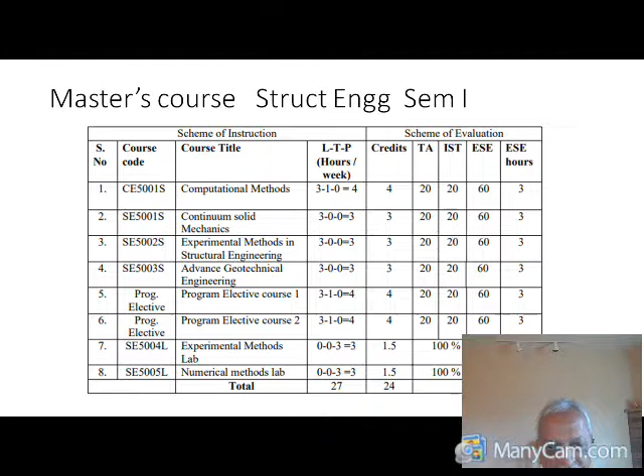So if you want to refine your understanding and narrow the gap between the predicted behavior and the observed behavior, then we have to go on reducing the number of assumptions, go for a realistic structure, its idealization, a refined idealization, and then predict the behavior, which brings you closer to reality.

If you see the primary objective of structural engineering, as a structural engineer, when you want to master it, you must realize that as a structural system, when your objective is understood properly—consider the primary objective of structural engineering—you will see that in structural engineering we first of all have a structural system, a structure for that matter. Secondly, it has to carry some loads, and thirdly, the structure must be so designed, so analyzed, so planned, so constructed that it carries the load applied on it safely and efficiently.

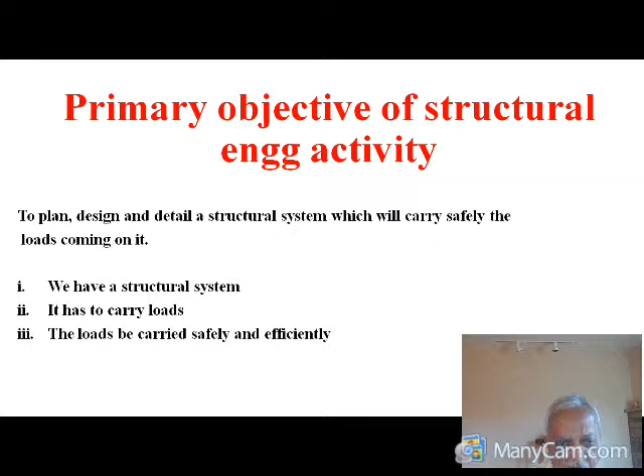So first of all, we have a structural system. Now what is a structural system? If you ask a common man what a structure is, he has got some vague idea. He will say there might be buildings, bridges, or fluid containing tanks like water tanks, oil tanks, and so on. Or there are retaining walls in hilly areas where you retain earth which is otherwise going to slip. Then you have dams where water is retained on one side, or the aircraft structure which floats in air, carries the weight from one place to another.

Then you have the ship which floats on water, again carries weight from one place to other place. Then you have automobiles which move on the road surface, but again carry loads. Then you have tunnels for passage of roads, railways, or pipelines. Then you have jetties for berthing of ships on the port and harbor. Then you have cranes for lifting material. These days at many construction sites you will see tower cranes erected for transport of material from ground to the required level. Then you have balloons, which many times were used, even for entertainment purpose, for taking objects up the sky, transporting them from one place to another.

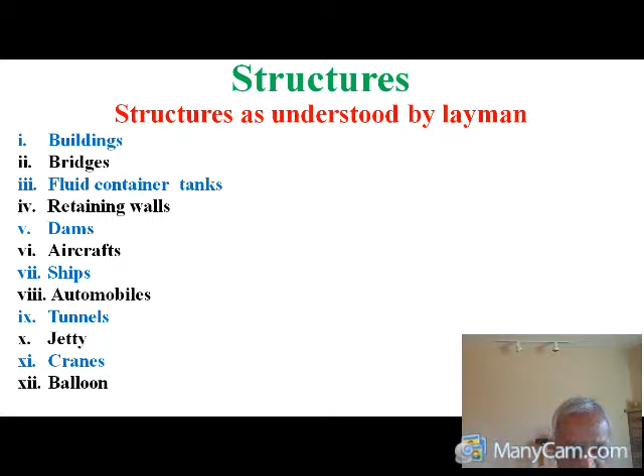While in floor grid you have beams and slab construction, the slab is a two-dimensional medium. Then you have shells, which are three-dimensional structures, many times used for roofs of different types. Then you have folded plates, many times used as roof. Then you have 3D solids, used in foundation blocks. Then you have the plane stress problem, which we will study in detail, the plane strain problem, and so on. So the understanding of a common man as a functional description for structures, and this proper itemization of different components of structures, is what an engineer tries to understand.

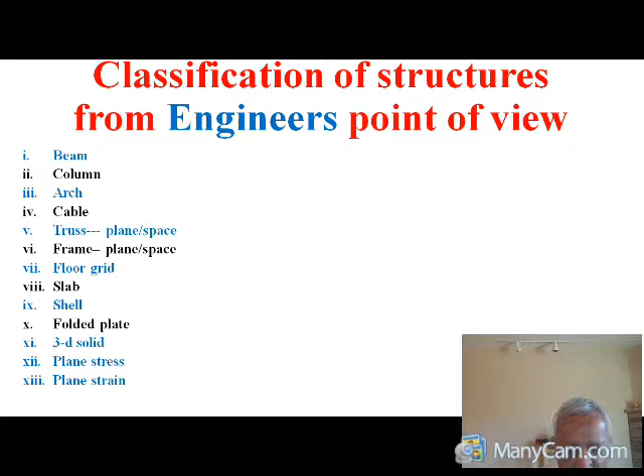In that also, among various types of descriptions an engineer gives to structure, if loads are applied on the structure, we say we have a structure made up of several components. Therefore, if you properly define the structure, we say a structure is an assemblage of members suitably connected to each other and supported, so that it carries the load coming on it safely to the support or foundation. Thus, the basic building block of any structure is a member or element which may be 1, 2 or 3 dimensional. So a structure basically is an assemblage of members.

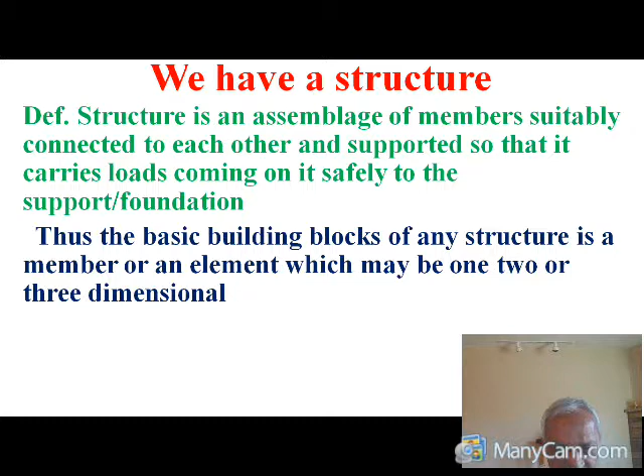So now, what are the basic elements or building blocks of the structure? We have the truss element, the members of the truss, which carry primarily axial force, maybe tension or compression. Then you have the beam element, which carries primarily shear force and bending moment. Then you have the 2 or 3 dimensional frame element, which carries axial force, shear force, bending moment, and so on. Then you have the slab, the 2-dimensional medium, which has bending moment as internal force, the torsional moment, and the shear force.

We have the plane stress element, which we will study in detail in the present coursework, wherein we have the stresses in it, sigma x, sigma y, and tau xy. You have the plane strain element, in plane stresses and out of plane stresses, developing sigma x, sigma y, sigma z, and tau xy. We will see the detailed description of these stresses shortly.

Then we have the membrane element, like a balloon or a shell, where it carries primarily the in-plane stresses sigma x and sigma y. Then we have the shell element, a concrete shell for that matter, which carries membrane forces Nx, Ny, Nxy, the shear and the bending Qx, Qy, Mx, My, and Mxy, the torsional moment.

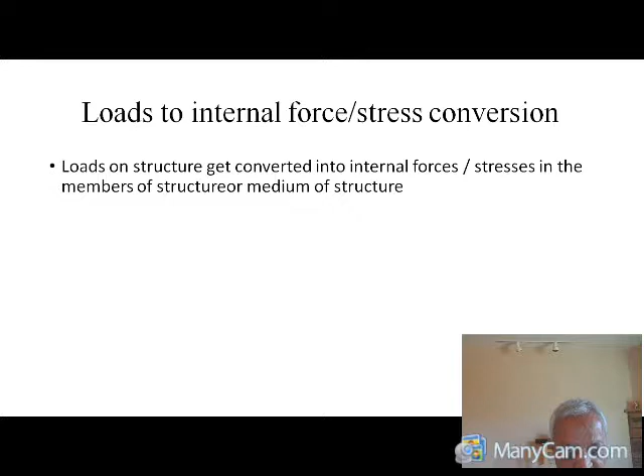So we have the structure and an assemblage of members to carry these loads safely. As far as the loads are concerned, that is many times an external phenomenon, but the structure develops as a resistance internal stresses due to these external loads. So we say that the primary objective of any structure, therefore, is that while resisting the external loads, the structure resists through internal forces.

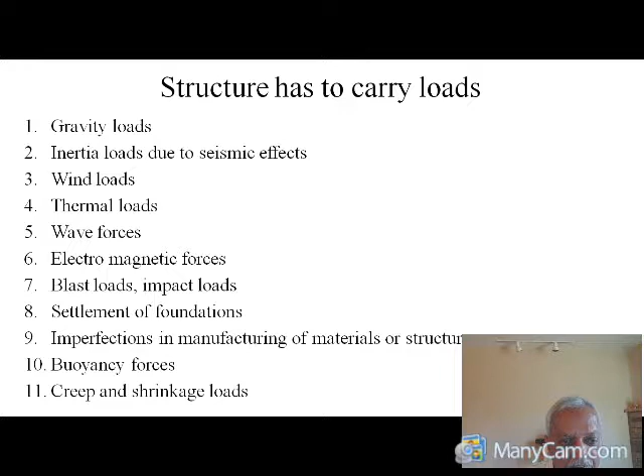Now let us see what internal forces a structure develops. So though there might be various types of loads which we have listed, for any structure, for that matter, when you have got these building blocks - truss, beam, frame and so on and so forth - we see that only 4 types of internal forces are developed in the members.

There might be axial force, which is either tensile or compressive. There might be shear force, there might be bending moment, and there might be torsional moment.

Either one, two, or all of them are developed in the structures. So no matter what structure you are considering, no matter what loads are considered, innumerable structures, innumerable loads, but internal forces are only of 4 types: the axial force, the shear force, the bending moment, and the torsion.

If you go one step forward, what stresses are developed? You must distinguish between a force and a stress. Force is a gross quantity, while stress deals with something on a different level. So you have the member carrying so much force, say kilonewtons, tons, pounds, or kgs, while you have to consider another quantity called stress, which is nothing but force per unit area.

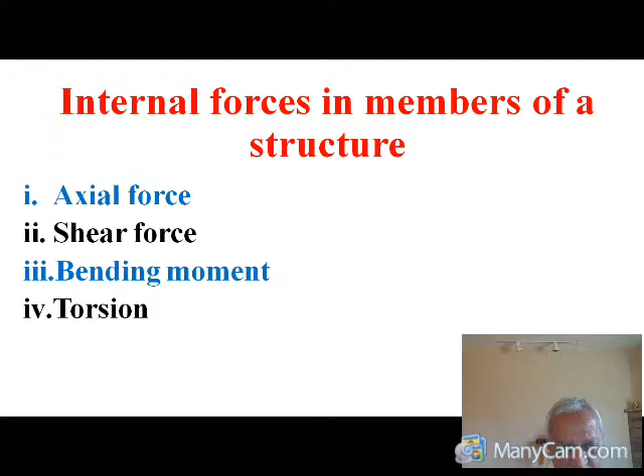So we see that we have started with a structural concept, hundreds of types of structures. Then we have several building blocks of the structures, four types of internal forces developed in the structure, and basically only two types of stresses, but we've further classified that into three because the behavior is sometimes different: normal stress compressive, normal stress tensile, and the shear stress.

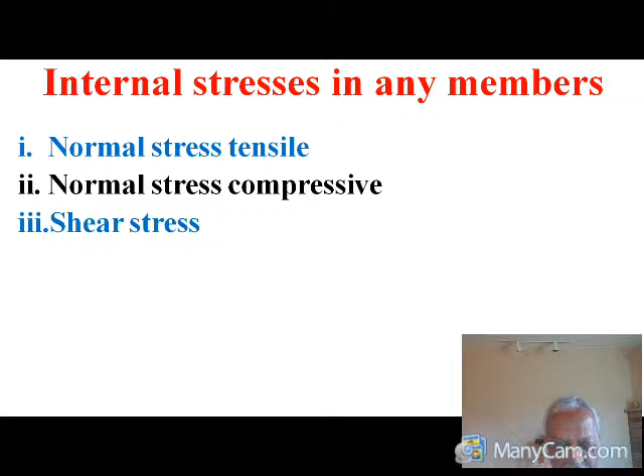Now we say that we have a structure which is to be made out of materials. So various types of materials we deal with. We have different types of materials: the natural materials, the man-made materials, the combination materials, the structural materials, sometimes the aesthetic materials, or the functional materials, and so on. So many different types of materials are being made and used.

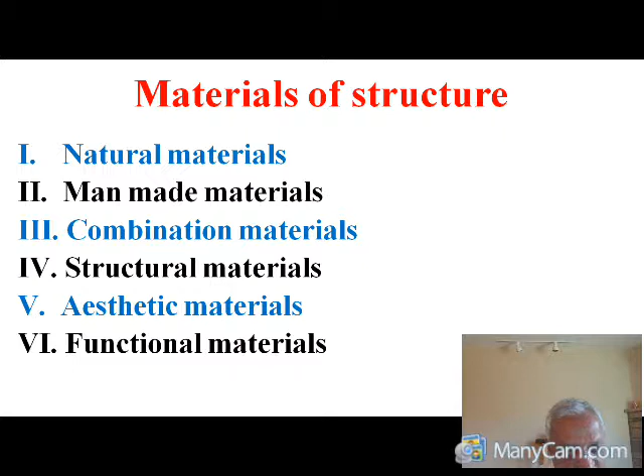As far as natural materials are concerned, we have listed a few, but many more can be added. The soil, the stones, the sand, which can be crushed stone or natural sand, then we have the timber, we have natural fibers which are available in nature, such as jute or bamboo fibers. Then we have the hair, human or animal hair.

We have the skin, the animal skin, which is used in some applications. We have the bone, also used in some applications. Natural material, water or air, and so on.

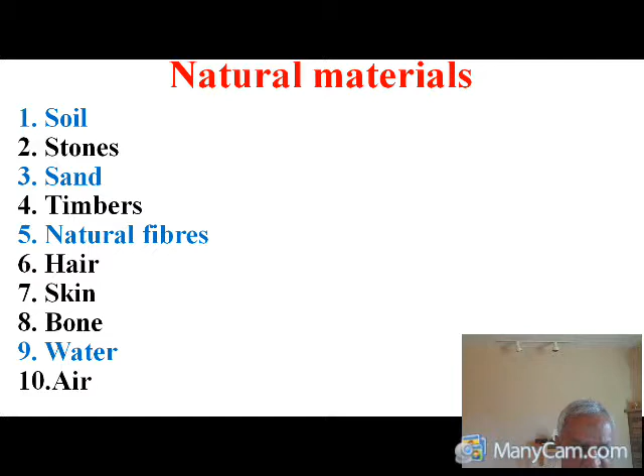So these are all different materials which go into structures in one way or another, and you have to deal with them. As far as man-made materials are concerned, we have bricks, concrete, metals, non-metals, polymers, man-made fibers, and so on. Metals are also available in terms of bulk, rods, or fibers. So there are various types of materials available.

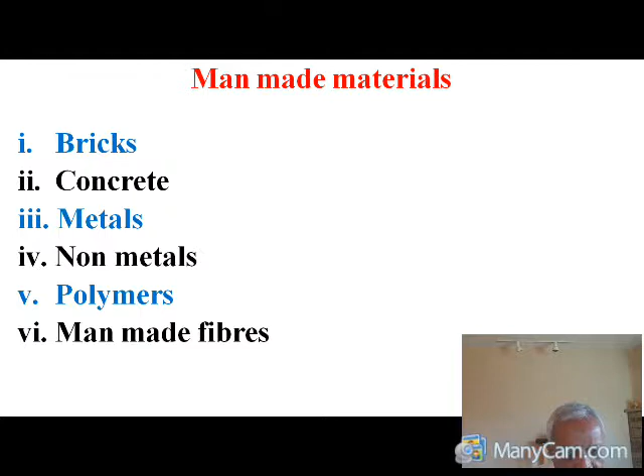Now in olden times, people tried to understand the behavior of simple structures, like the attempt made by Galileo to understand the behavior of beams, Robert Hooke to understand elasticity, Bernoulli, Euler, and so on, who tried to understand the buckling problem or the bending problem. Historically, those were the times when people tried to formulate a scientific basis for predicting the behavior of structures, and many theories were developed in those days.

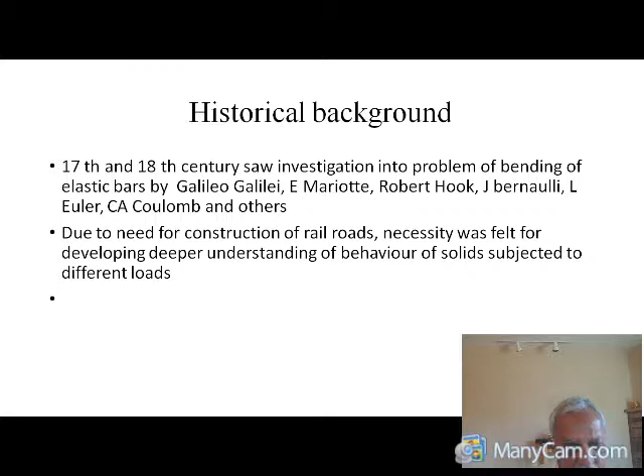As far as the theories developed in the olden times were concerned, several assumptions were made, governing equations were derived, and the behavior of structures was predicted.

So we have the elementary strength of materials, wherein we studied the theory of bending, that is converting bending moment to bending stress, either tension or compression. Then there was the theory which enabled you to convert shear force into shear stress. Having considered shear stress and normal stress, you have the principal stress concept, which gives the maximum value on some plane. Then you studied the torsional theory, converting torsional moment into torsional stress or shear stress. You have also seen methods of calculating deflections. That is all part of elementary strength of materials.

When you see real life problems, you will see that if you take the simplest problem of a beam carrying a point load, near the point load, where on a very small area you have put some load, locally the stresses might be very high. Near the support, you have got a large reaction developed, again leading to very large stresses very close to the support.

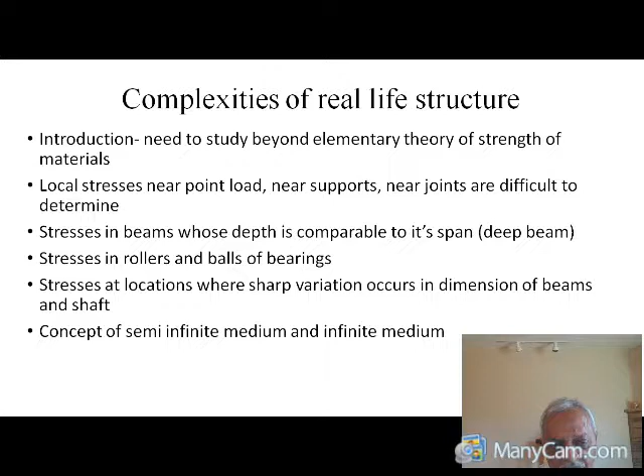So we see that the complexities of real life structures will force you to go for more refined theories rather than relying on the elementary strength of material theories.

You have made assumptions in your earlier courses while analyzing structures that the material you are going to use is isotropic, meaning properties are the same in all directions. But in real life, it is very difficult to get such material. Many times we deal with orthotropy, which indicates that properties are different in mutually perpendicular directions, like fiber reinforced plastics, which are very strong in one direction and not so strong in the other. If you take anisotropic material, the properties are different in different directions.

As far as homogeneity is concerned, we assume the properties are same everywhere. But many times we deal with materials which are not homogeneous, like reinforced concrete. You have concrete having some property, while the steel reinforcement has a different property. So at a micro level, we will not be able to call reinforced concrete homogeneous.

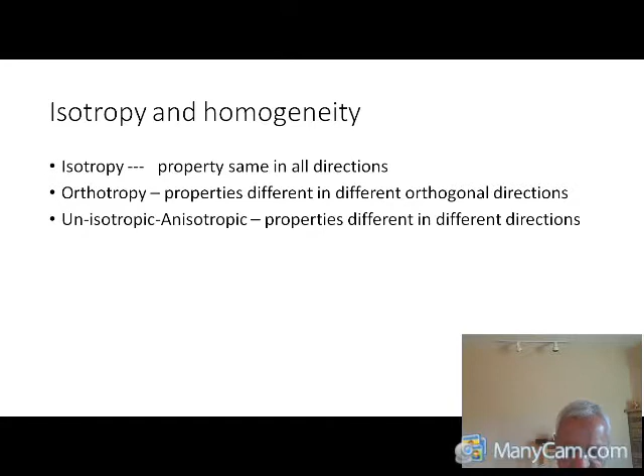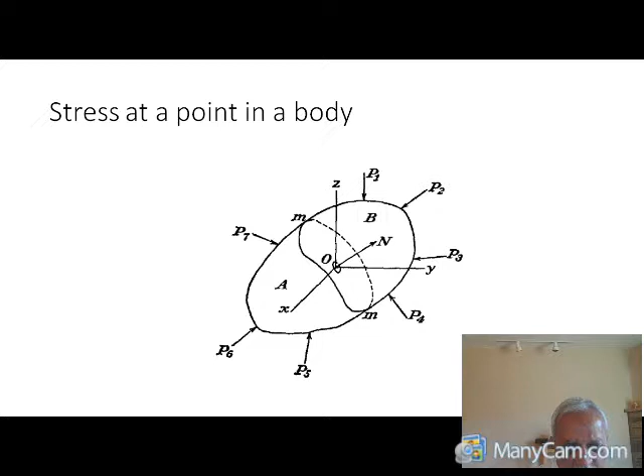If you see the simple definition of stress that you are going to calculate, you will see that the stress at a point, generally stresses do not remain constant throughout the body. They are calculated on a small area, and for that small area we just want to know the average stress. So you work out the total force on the area, consider the area on which the force is applied, and then take the average stress as delta P by delta A, which we call the average stress applied on it.